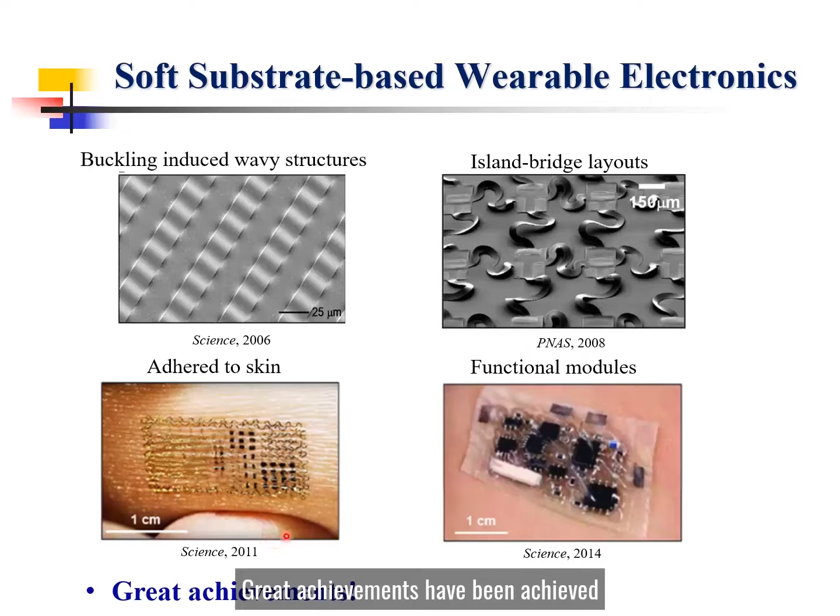Wearable and flexible electronics has been significantly advanced by many groups. Two exemplary experts are Professor John Rogers and Yonggang Huang at Northwestern University. They use soft materials such as PDMS as the substrate and mechanical instability to make wearable electronics. Great achievement has been achieved as highlighted by their high-profile publications.

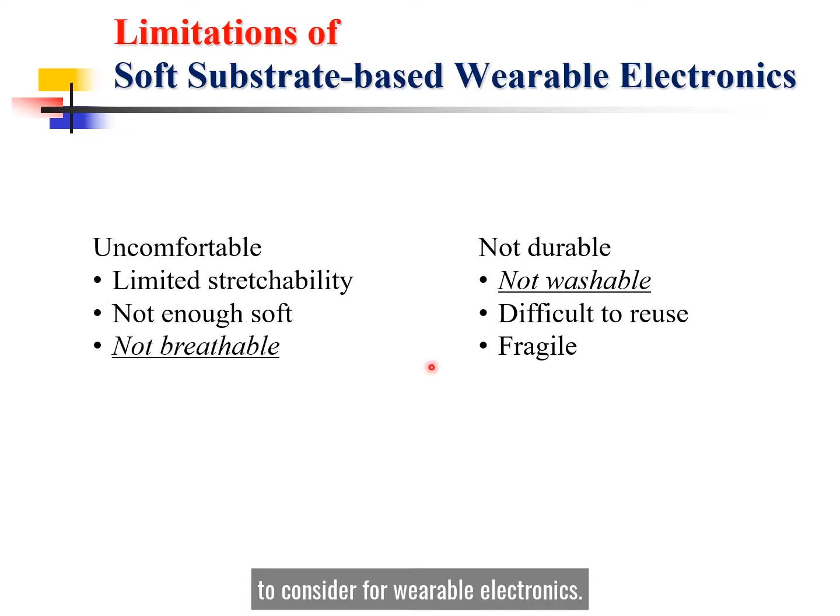However, soft material-based wearable electronics have some limitations. They are often uncomfortable and not durable, such as limited stretchability, not enough soft, and not breathable. More importantly, they are not washable. Washability should be an important factor to consider for wearable electronics. So, what is really washable?

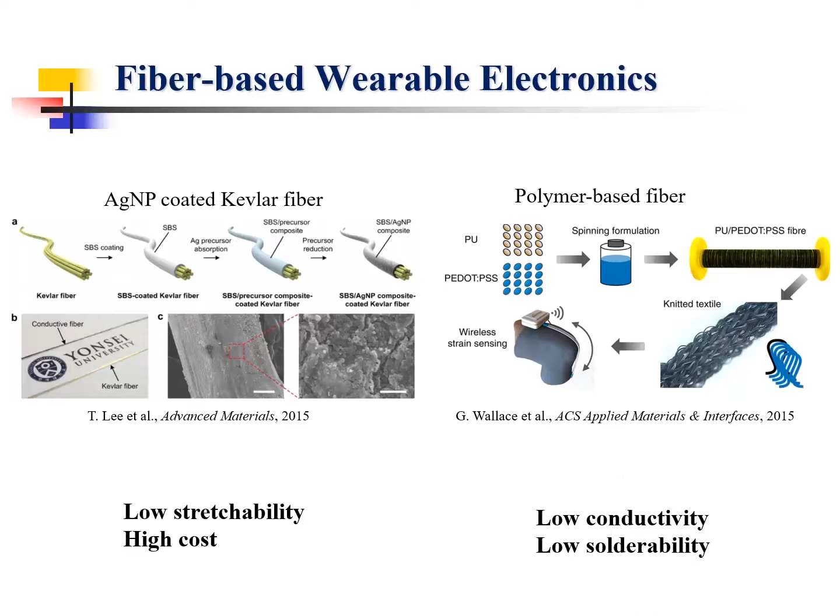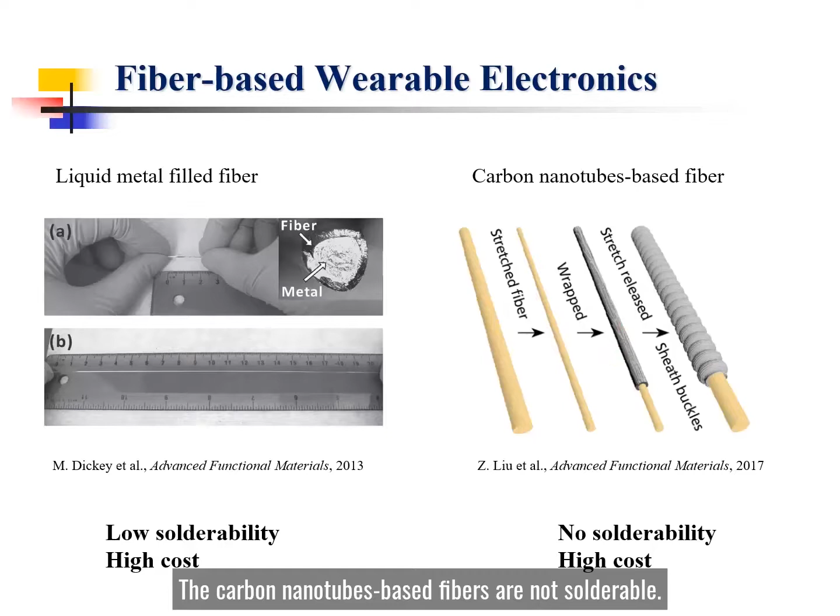For these two works, liquid metal filled fibers have low solderability. The carbon nanotube-based fibers are not solderable. To sum up, fiber-based wearable electronics have the following major limitations that limit the use in clothing: low stretchability, low conductivity, low washability, and low solderability.

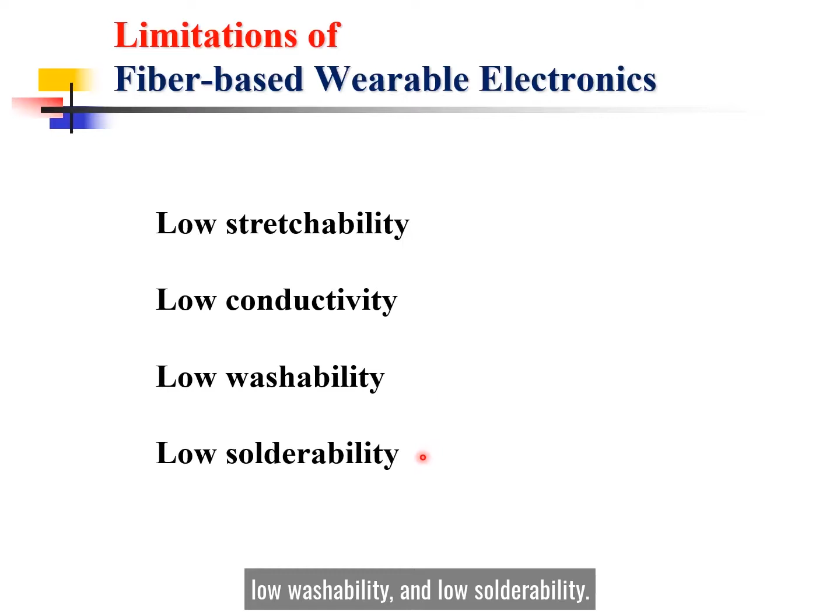So, our motivation is to develop fabric-based, highly stretchable, conductive, washable, and solderable interconnects. Inspired by the buckled silicon supported by soft substrate using mechanical instability, we use polyurethane as the elastic material and copper fiber as the conductive material to prepare the fiber-based wearable electronics.

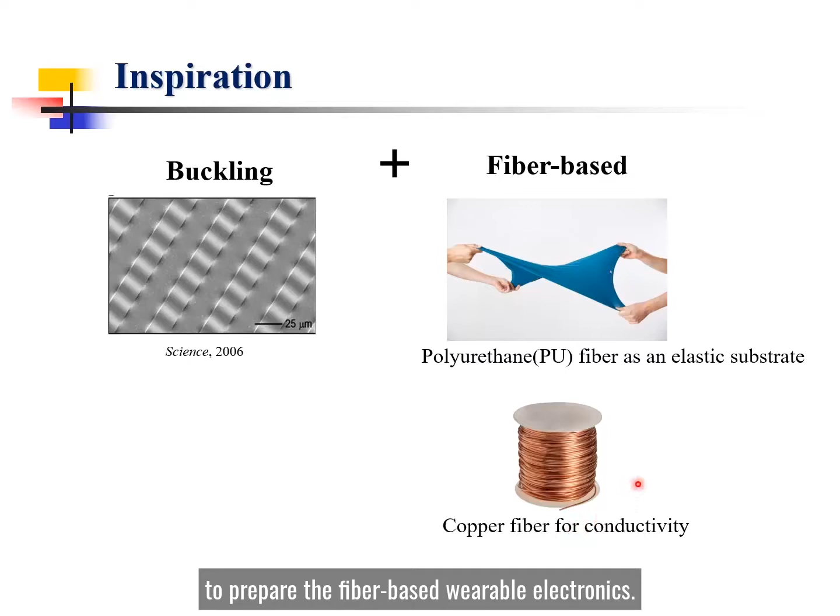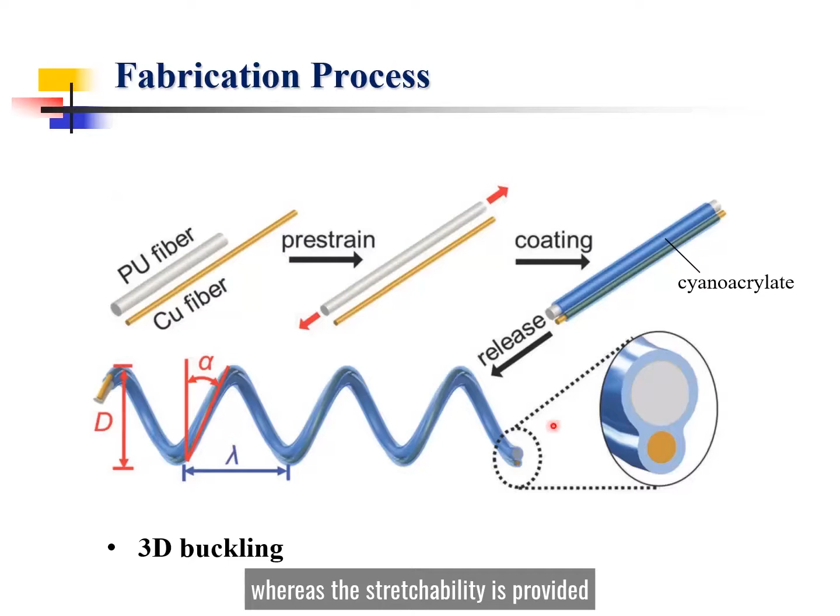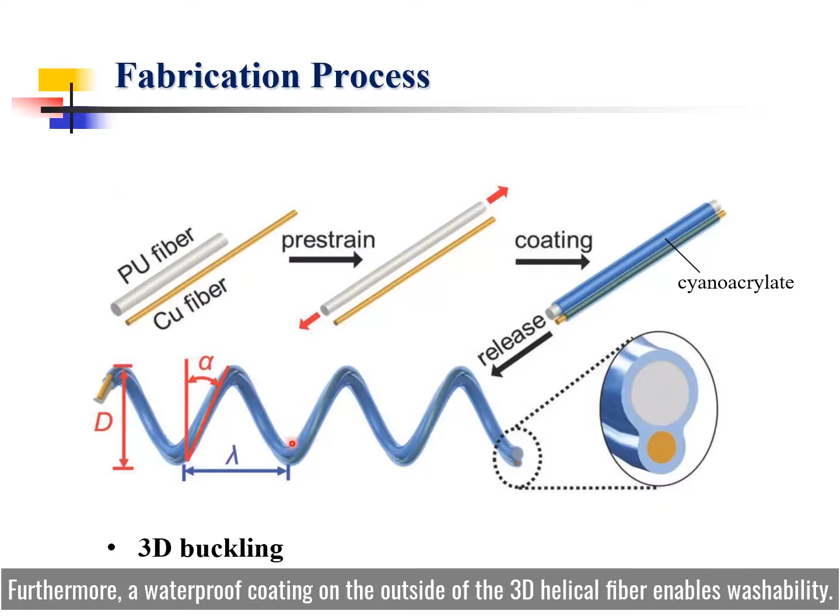First, the PU fiber was pre-stretched by a large strain ranging from 100% to 400%. Then they were coated with cyanoacrylate and bound with copper fiber with radius about 30 micrometers. The contraction of the pre-stressed PU fiber buckles and twists to form a 3D helical shape. In this fiber, the higher conductivity and solderability is provided by the copper wires, whereas the stretchability is provided by the 3D helical shape of the fiber. Furthermore, a waterproof coating on the outside of the 3D helical fibers enables washability.

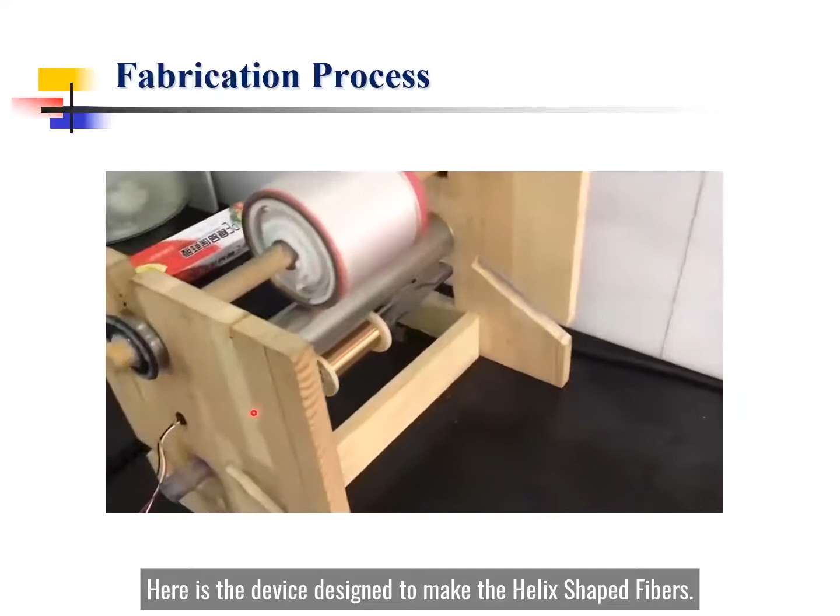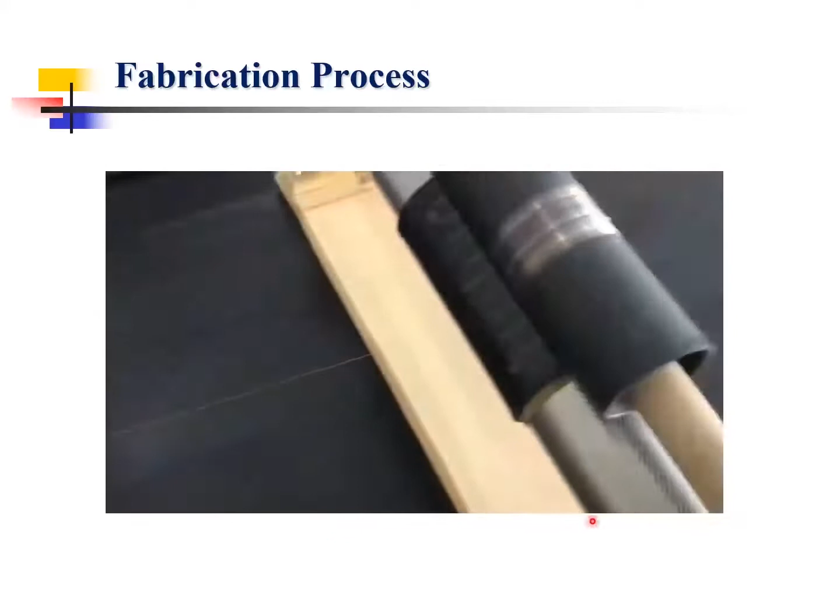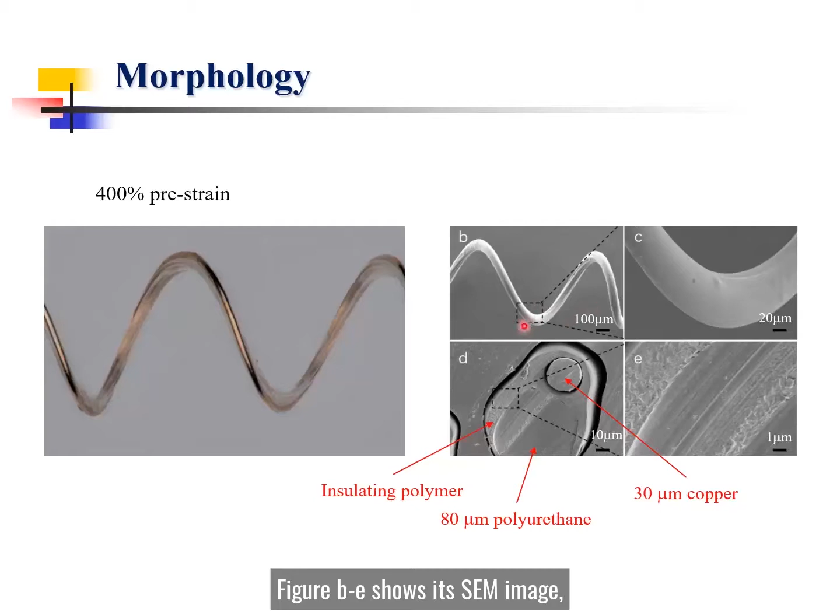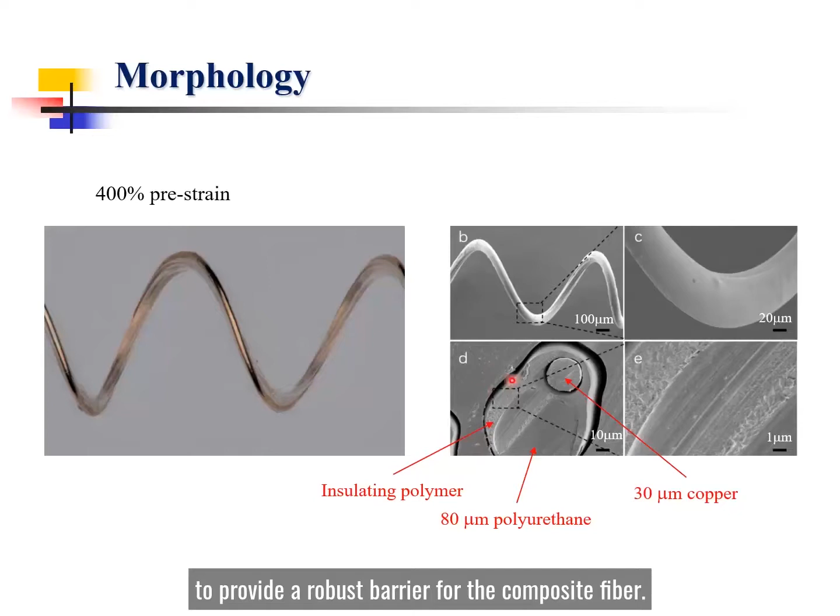Here is the device designed to make the helix-shaped fibers. The pre-stress is controlled by controlling the speed difference of the drum. After releasing the tension at both ends, the composite fibers retracted to form the spiral structure. This figure shows a buckled helical fiber with 400% prestrain. Figure B to E shows its SEM image, and the cross section of the composite fiber is shown in Figure D, in which the insulating polymer layer forms a uniform coating to provide a robust barrier for the composite fiber. This is in line with our expectation.

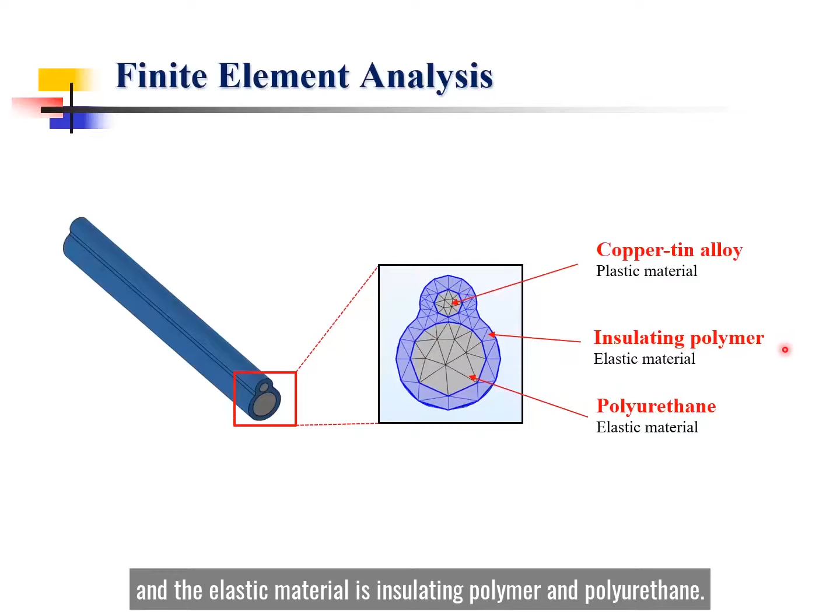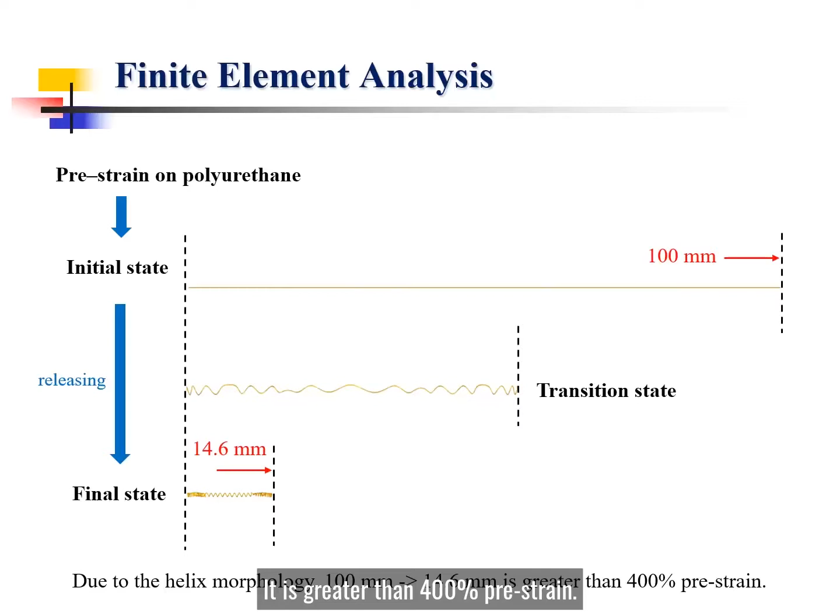We also conduct finite element analysis to understand the mechanism. In this structure, the plastic material is a copper alloy, and the elastic material is insulating polymer and polyurethane. Due to the helix morphology, the length of the fiber retracted from 100 mm to 14.6 mm. It is greater than 400% prestrain. And then we can see that the middle section of the helical fiber can produce periodic helix.

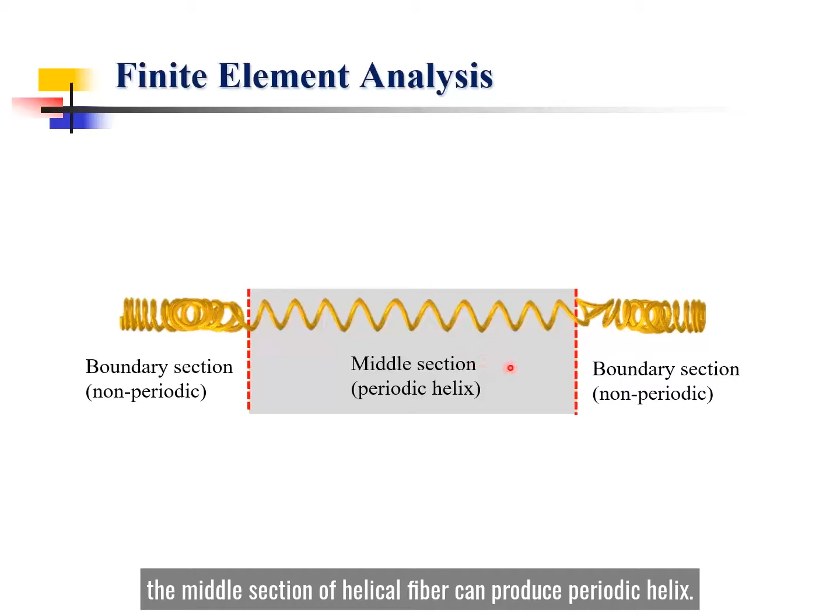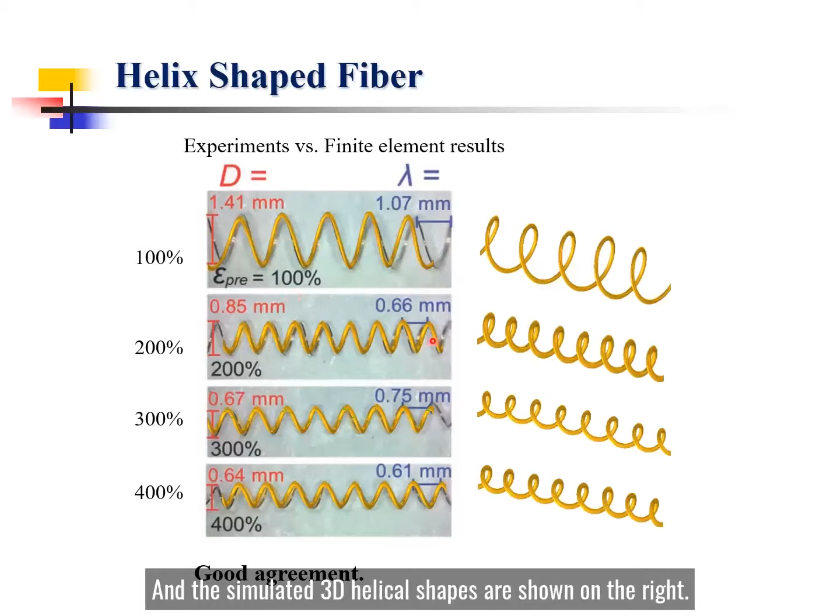The diameter of helix D decreased from approximately 1.4 mm to 0.6 mm as the prestrain increased from 100% to 400%. The experiment results agree very well with the simulation, and the simulated 3D helical shape are shown on the right.

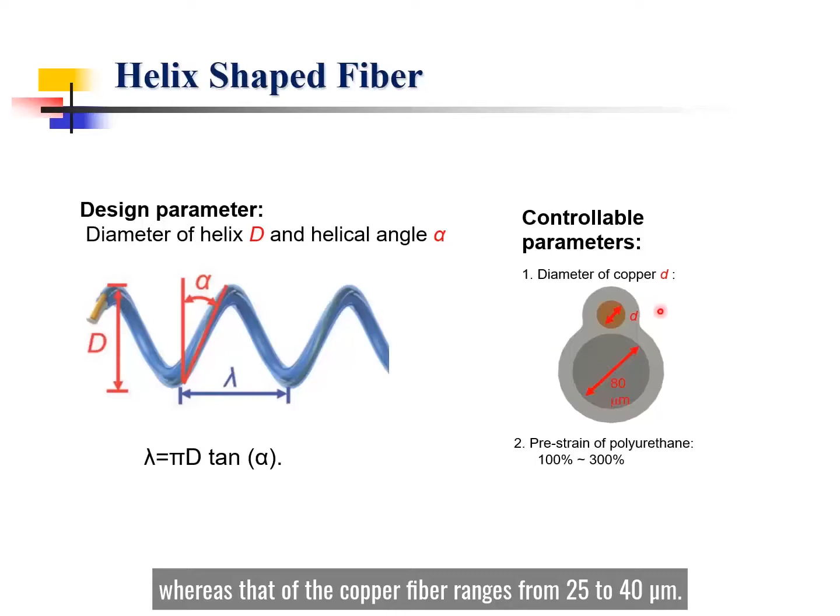A 3D helix is described by two parameters, diameter d and the helical angle alpha. The pitch of the 3D helix lambda is related to these two parameters via this formula. The diameter of the PU fiber is 80 micrometers, whereas that of the copper fibers range from 25 to 40 micrometers.

Through finite element analysis, the helix diameter decreases as prestrain increases for the different copper and PU fiber diameters. Under the same prestrain, thicker copper fibers lead to larger helix diameters. In contrast, the helix angle increases slightly as prestrain increases. This behavior is intuitive because thicker copper fibers have higher bending stiffness.

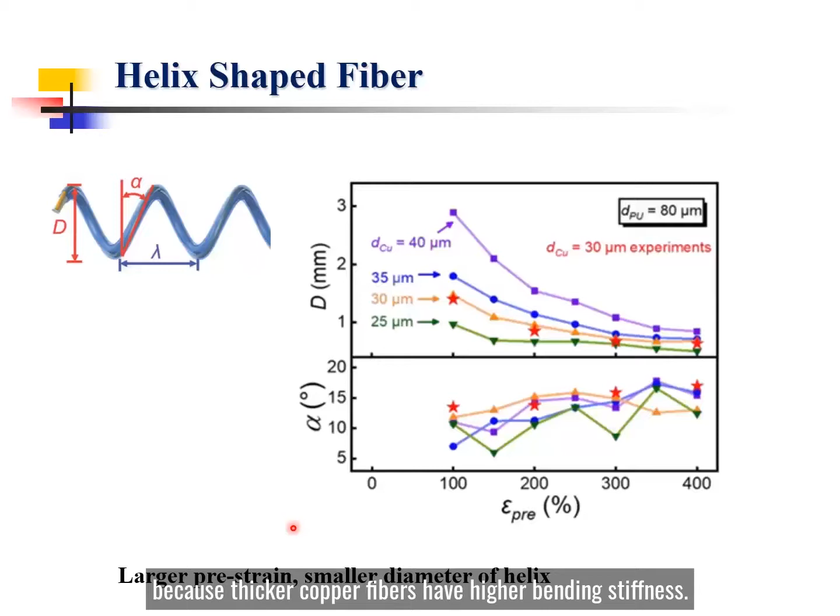Because of the helical structure, the fiber is stretchable. We can see that it fully recovers after 80% strain.

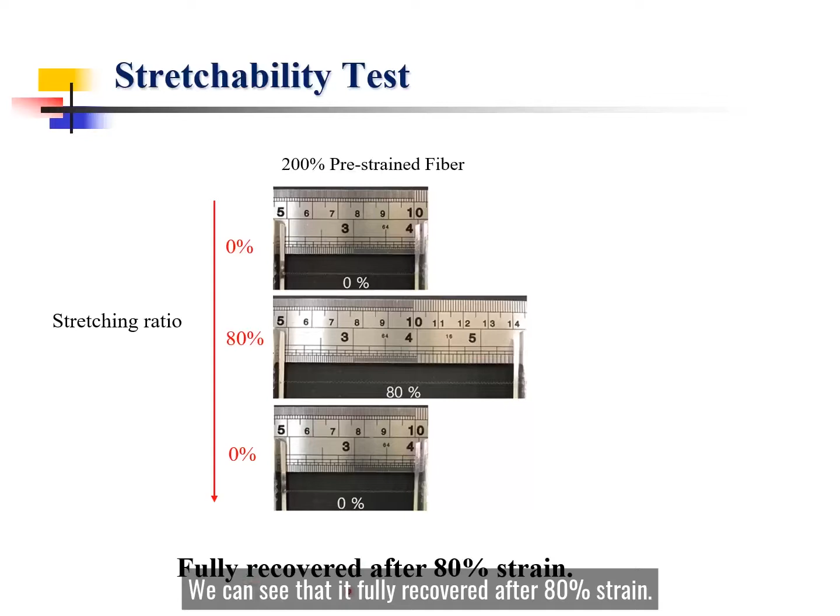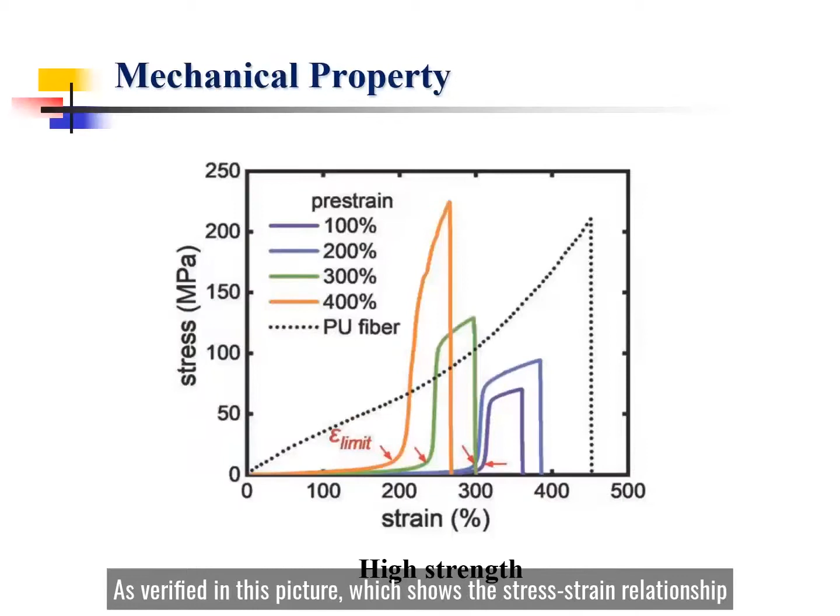It can be stretched to 400% without breaking, as verified in these pictures which show the relationship of the helical fibers using different prestrains. Since the helical angle increases with increasing prestrain, the limiting strain decreases as the prestrain increases.

The helical fibers are extremely soft before reaching the limiting strain and become much stiffer thereafter because of the direct stress on the copper fibers. The equivalent stiffness before reaching the limit strain is approximately 1 megapascal, which is on the same order of magnitude as the stiffness of the skin.

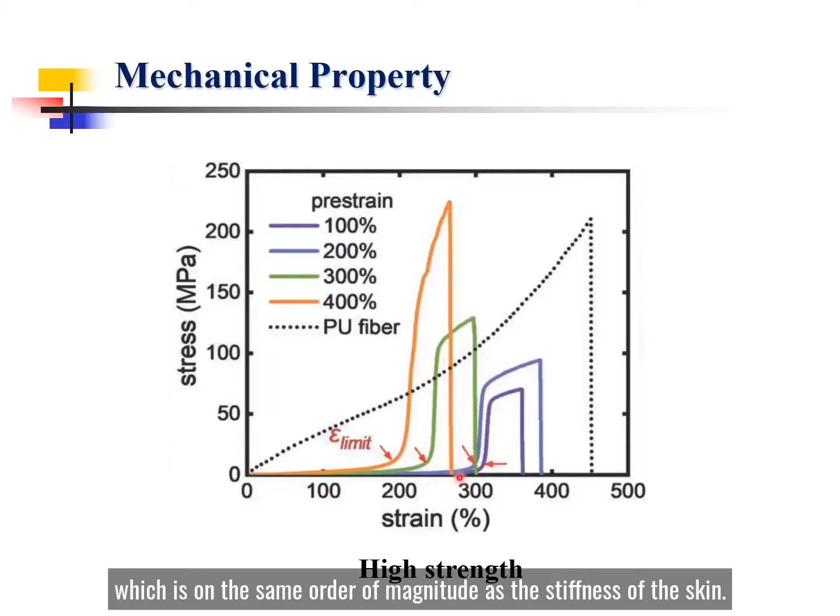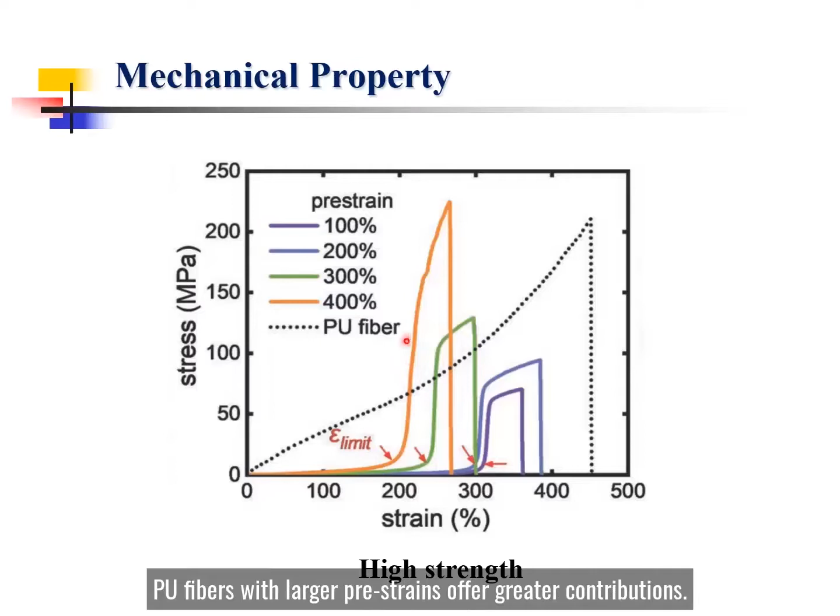The strength of the composite fibers comes from two parts, the PU and the copper fibers. PU fibers with larger prestrains offer greater contributions. Thus, the strength of the PU fibers is greater at higher prestrain.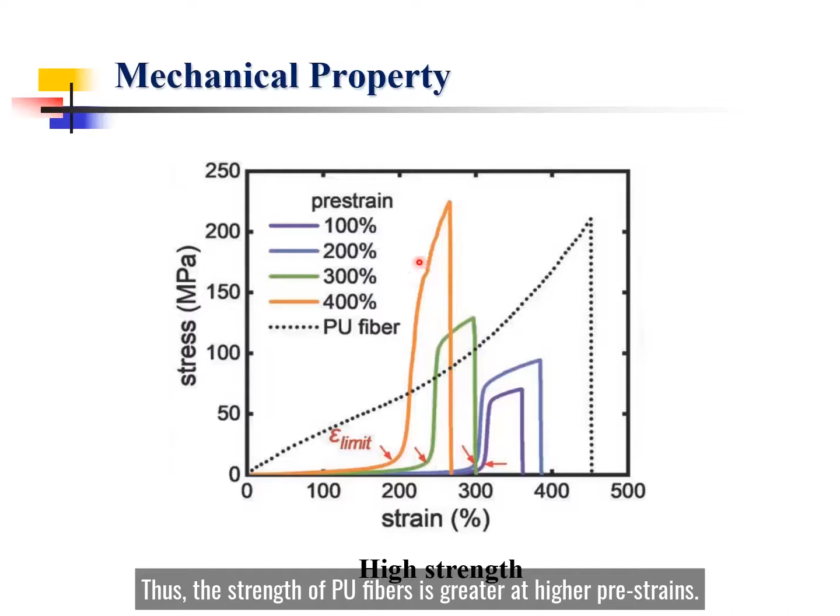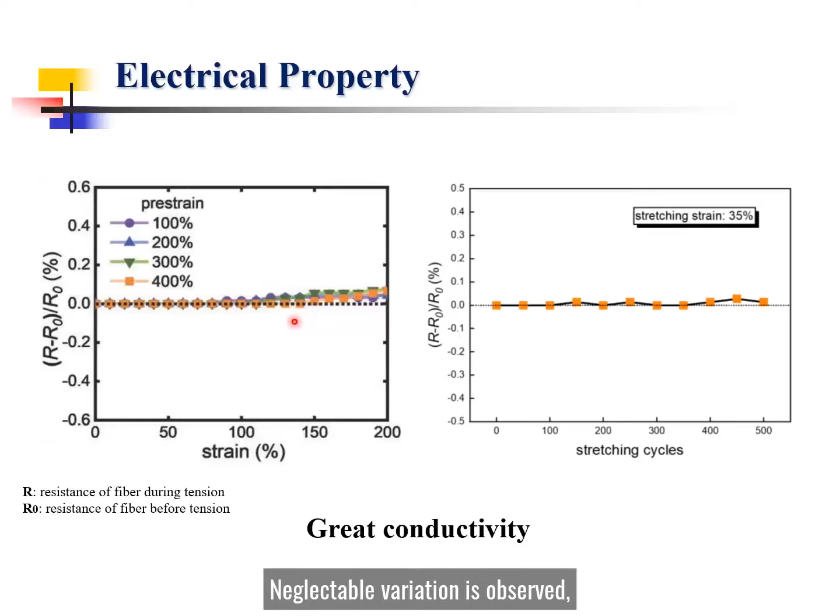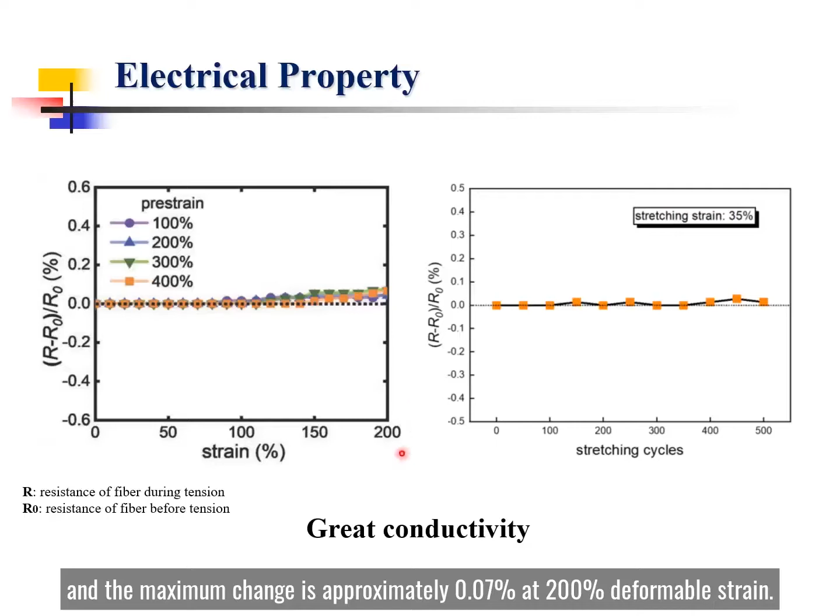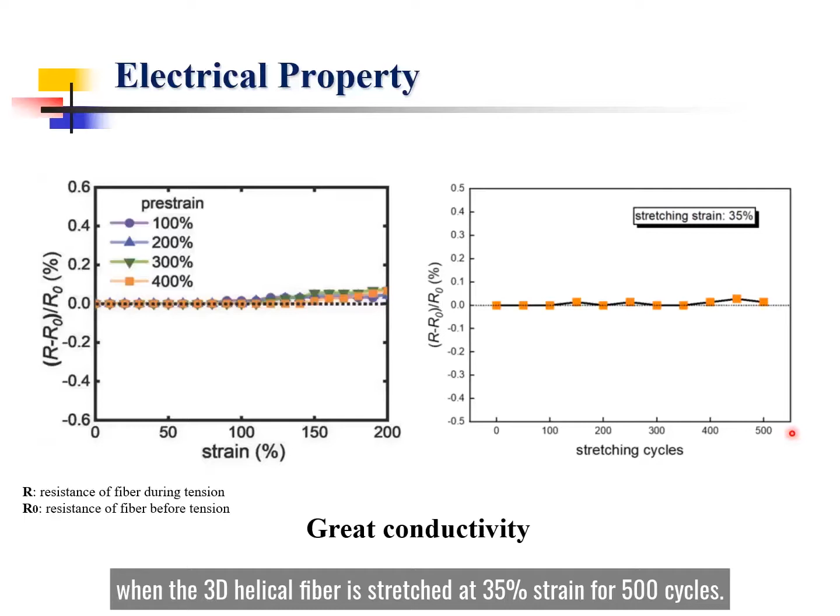The electrical performance was tested as shown on the left. Negligible variation is observed, and the maximum change is approximately 0.07% at 200% deformable strain. In the picture at right, the change of electrical resistance when the 3D helical fiber is stretched at 35% strain for 500 cycles shows a maximum resistance change of less than 0.03%.

Here we compare the performance of the present work with some reported results. We find that it is apparent that the present work outperforms all the reported results in terms of both the conductivity and the relative variation in electrical resistance.

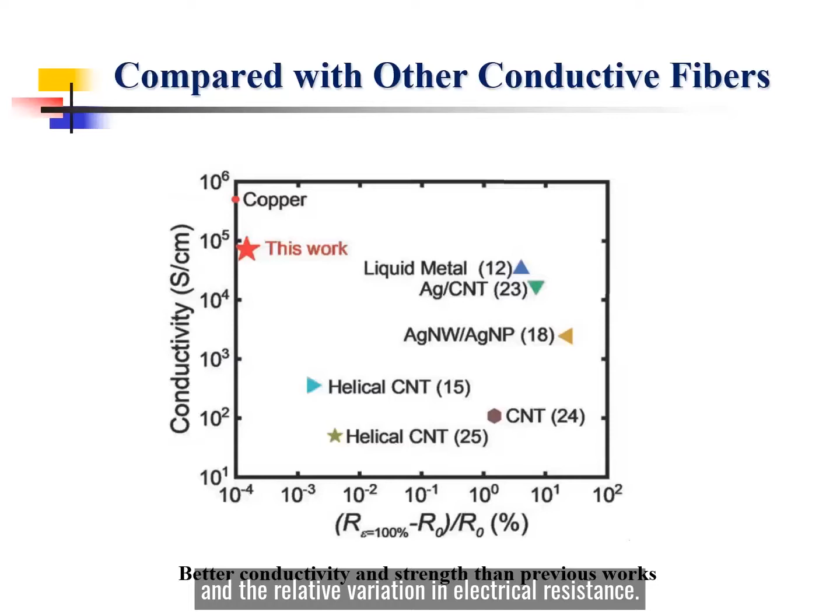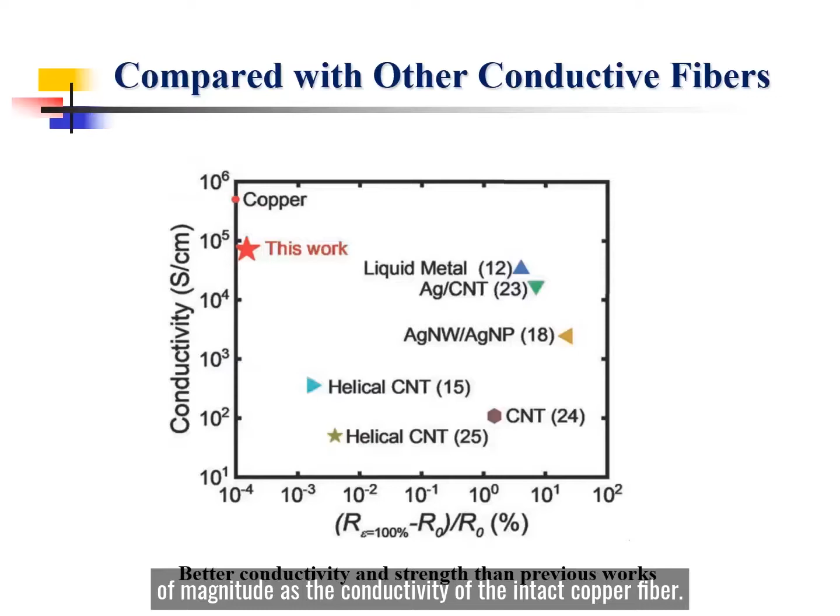Specifically, the conductivity of fibers in the present work is several orders of magnitude higher than that in many of the existing studies, and is roughly on the same order of magnitude as the conductivity of intact copper fibers.

Now we test the washable property of the fibers. Ultrasonic washing, which is a much more powerful washing approach than household laundry washing, was used to remove solid particles from the object's surface. As shown, the fibers are washed for 100 minutes at 20 degrees Celsius.

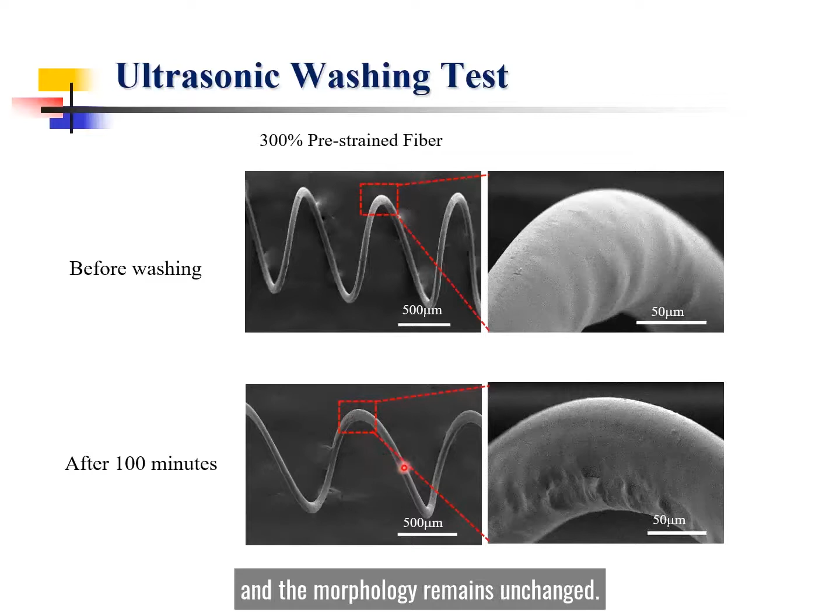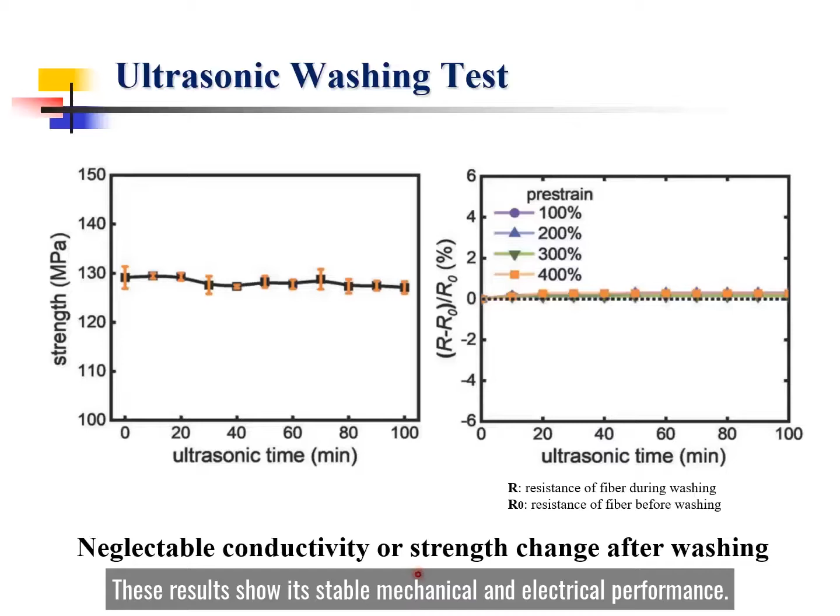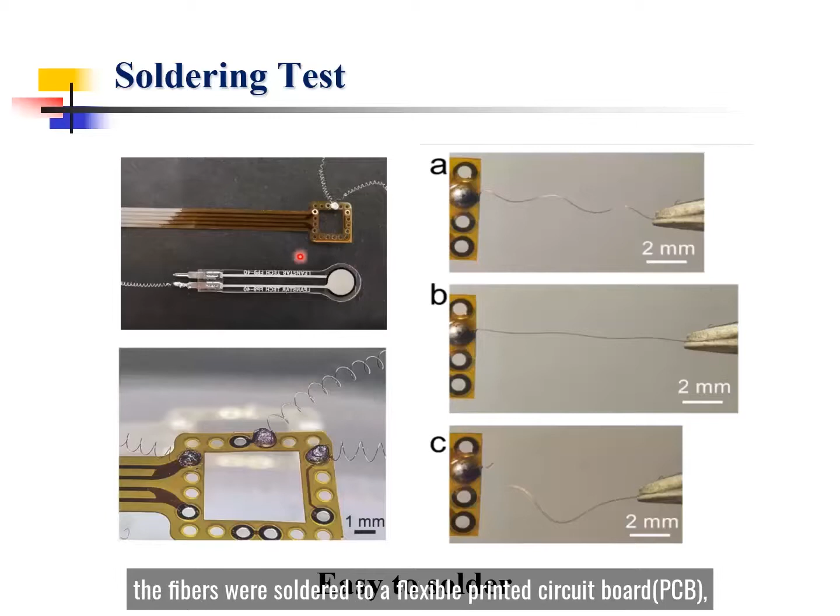Now we test the usefulness of the fiber in electric products. The fibers were soldered to a flexible printed circuit board using a standard soldering process. The cyanoacrylate and the PU fiber were melted at 200 degrees Celsius, and the copper fiber was exposed to form a joint with the flexible printed circuit board.

Moreover, a mechanical test was conducted, and the results showed that the solder joint has strong mechanical integrity, and that the fracture occurs at the fiber, not at the joint. Compared with other solutions to joint conductive fibers, such as using silver paste, the present method is mechanically robust and electrically efficient.

Here we soldered the fiber to the LED and did a stress test. This video shows that the solder piece is very robust to deformation. It is worth mentioning that since the copper fiber is continuous, the soldering point can be found at any location in the 3D helical fibers. This is helpful for designing wearable electronics.

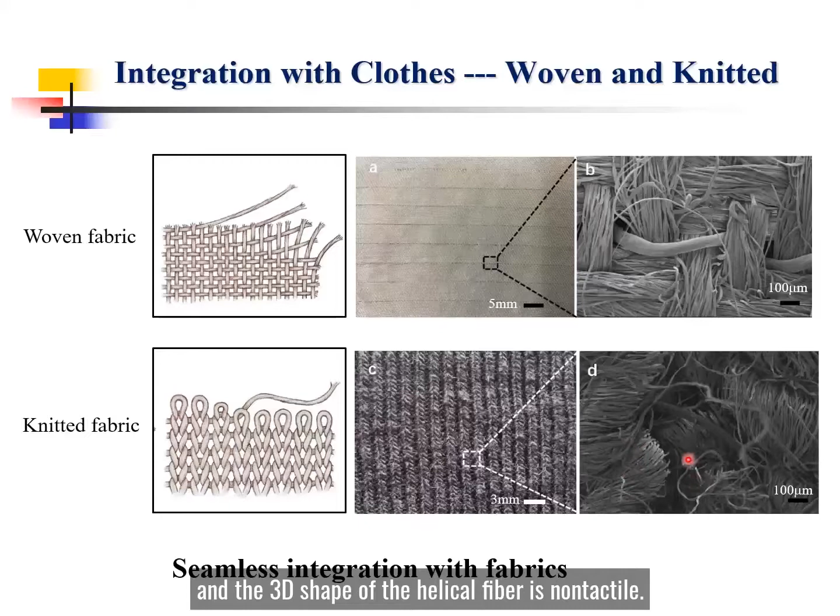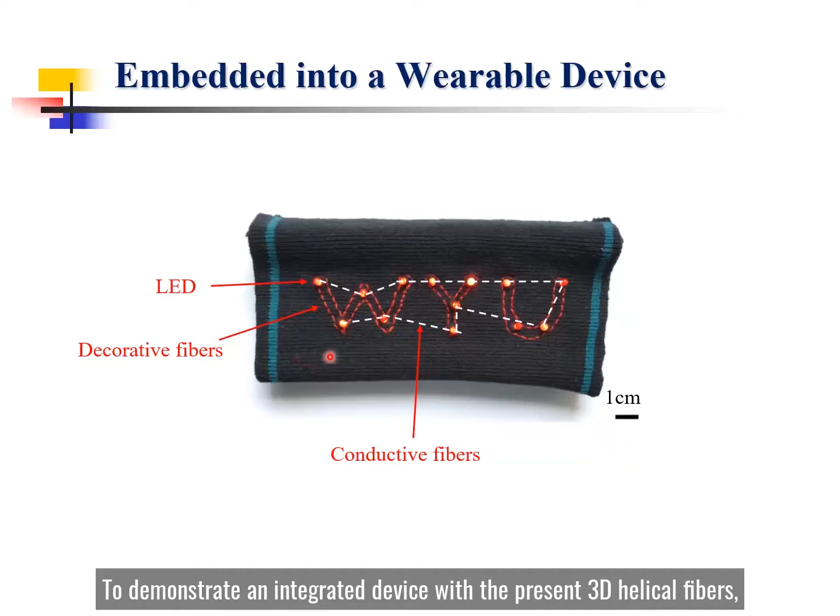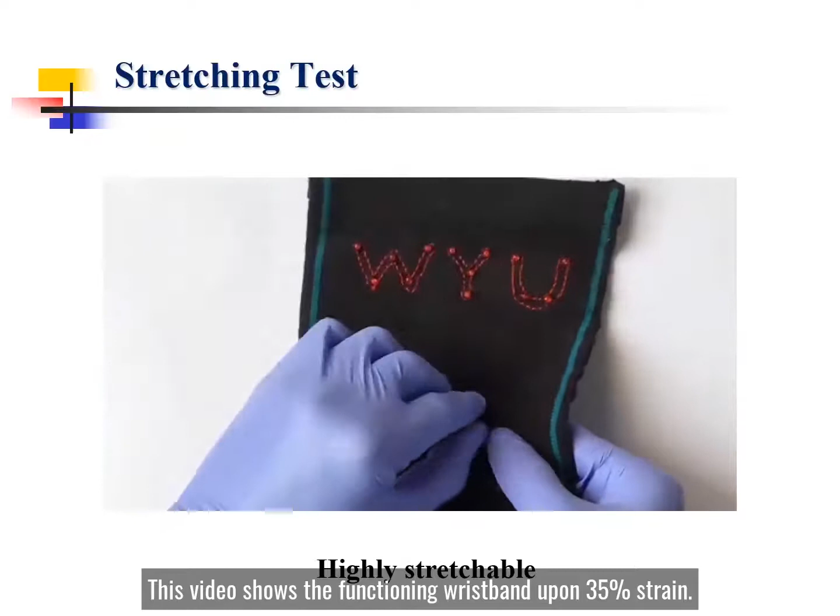To demonstrate an integrated device with the present 3D helical fibers and other functional components, a wristband which consists of a battery, LEDs, and the 3D helical fibers as the interconnect was made. The fibers perfectly fit in the textile and cannot be distinguished. This video shows the functioning wristband upon 35% strain.

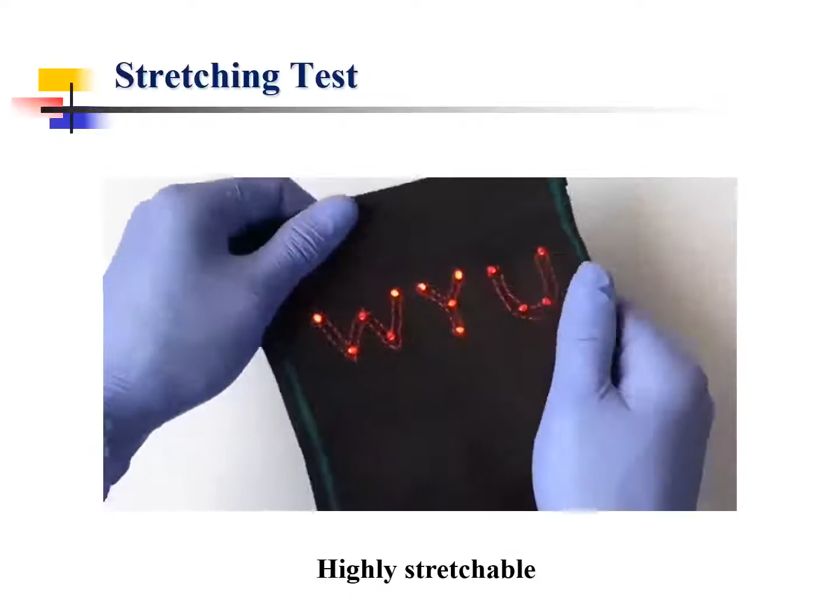A quick summary here. We report a way to make highly stretchable, conductive, washable, and solderable fibers consisting of an elastic PU fiber and conductive copper fibers. The developed fibers can be used as interconnects for wearable electronics. It can be seamlessly integrated with clothes by virtue of its 3D helical structure. This work may provide a new direction for wearable electronics.

In the future, the strategy of producing 3D helical fibers can be used to design devices with other functions, such as stretchable heaters, circuits, and optical fibers.